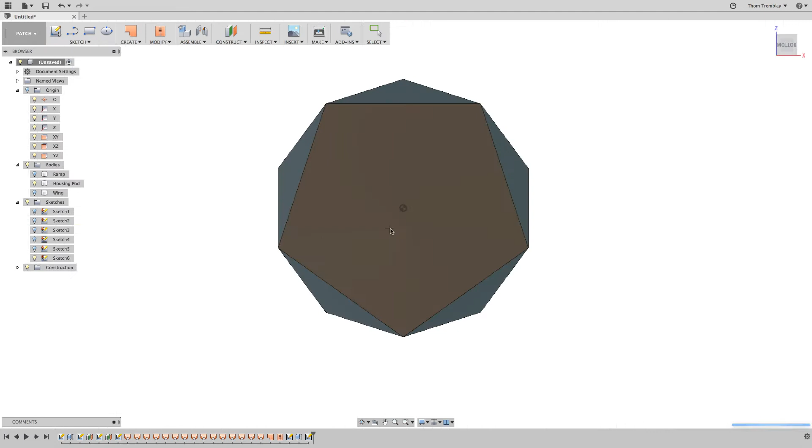Rather than creating freestanding bodies for the legs, we'll turn the housing pod back on and start a new sketch on the bottom, again using a polygon, this time a triangle to space the legs out.

I'll add circles to the endpoints of the triangle, setting a diameter of 2.5 millimeters to the first leg. Then, rather than applying dimensions to the other two circles, I'll use the equal constraint to make sure that all of the legs are the same size.

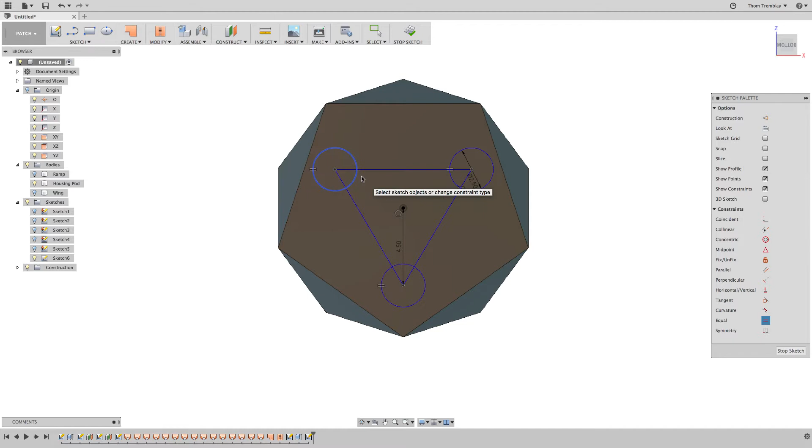An option that's been explored in other lessons is to use construction geometry, but in this case I'll leave the triangle as normal geometry and simply select the 6 different sections to define the cylinders.

I'll extrude them out 6 millimeters, joining them to the housing pod, and turn the ramp on.

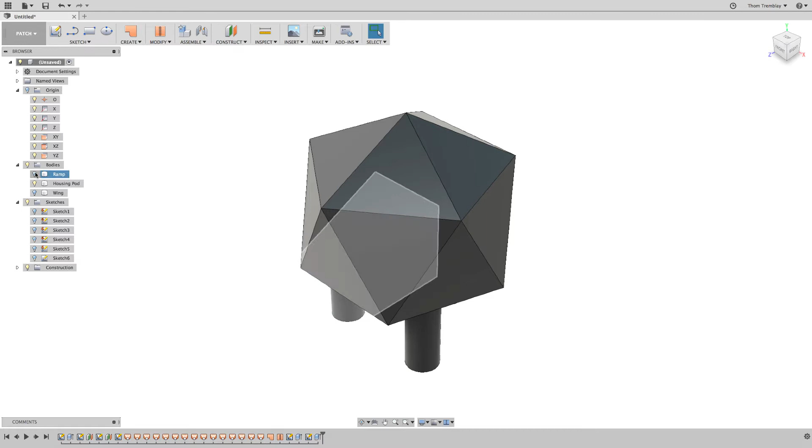In other exercises, we've used joints to relocate components and to connect them together. For the habitat, we're working with bodies. Bodies cannot be joined; however, the geometry of bodies can be used to reference the location of other bodies.

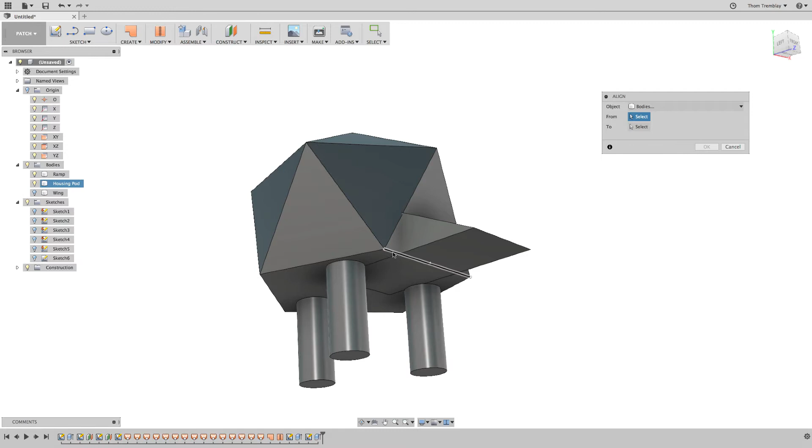From the Modify pull-down of either the Patch workspace or the Model workspace, I can start the Align tool. I'll make sure the Object option is set to Bodies, and then pick the bottom edge of the housing pod. For the second location, I'll pick the top edge of the ramp, and it will relocate the housing pod. When I click OK, the housing pod will be in its new location, aligned with the ramp.

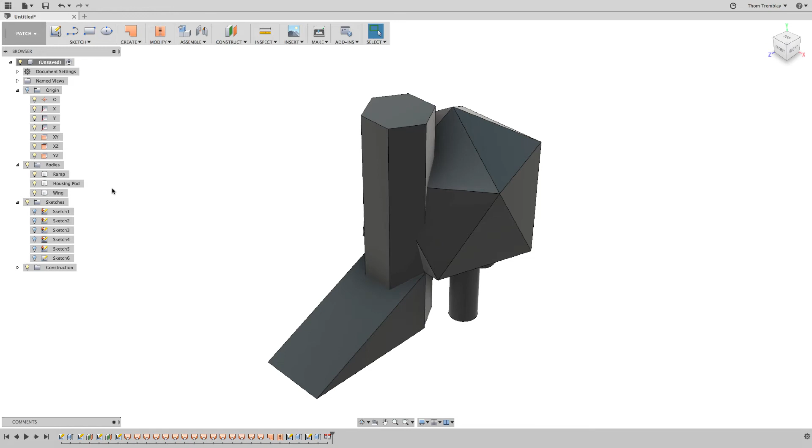I'll turn the wing back on, and for clarity, turn the ramp off. This time, I'll use the Move Copy tool to relocate the wing.

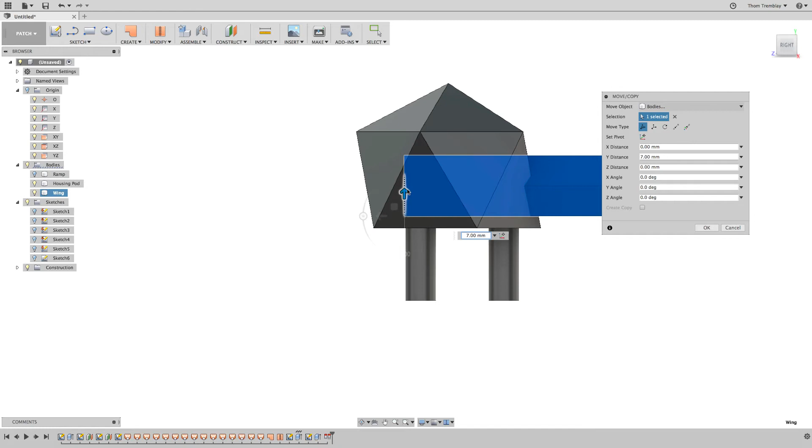I'll select the bottom edge of the wing, and it will give me a manipulator that will allow me to rotate the wing in place. I'll rotate it to be horizontal, so -90 degrees in my model, and then use the arrow or plane manipulators to move it up and back to its proper position with the housing pod.

When it's in the correct position, I'll simply click OK and take a look at the work.

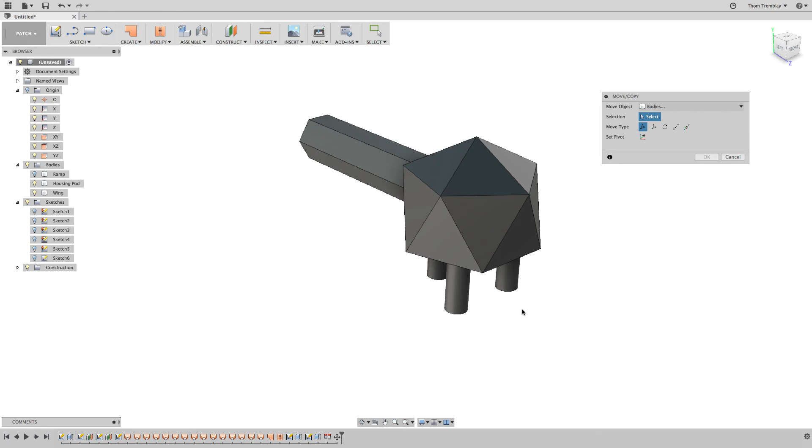Now what I need to do is replicate the housing pod and the wings to a second location. I'll start the Move Copy tool again, making sure that the Move object is still set to Bodies.

I'll select the housing pod and the wing, and using the Create Copy option, use the manipulator to create a second instance of the housing pod and wing, move it back, and rotate it 90 degrees into its correct position.

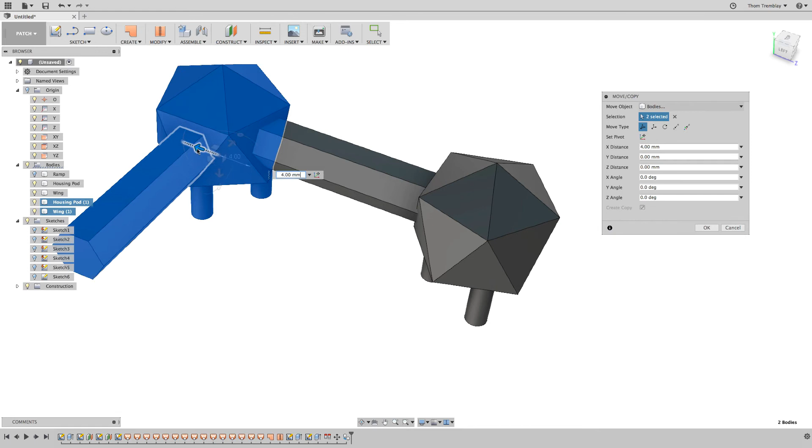Now I have one side of the habitat complete. At the center of the habitat is a control pod. To create it, I'll switch to the Model workspace, go to the Create pull-down, and use the Sphere primitive.

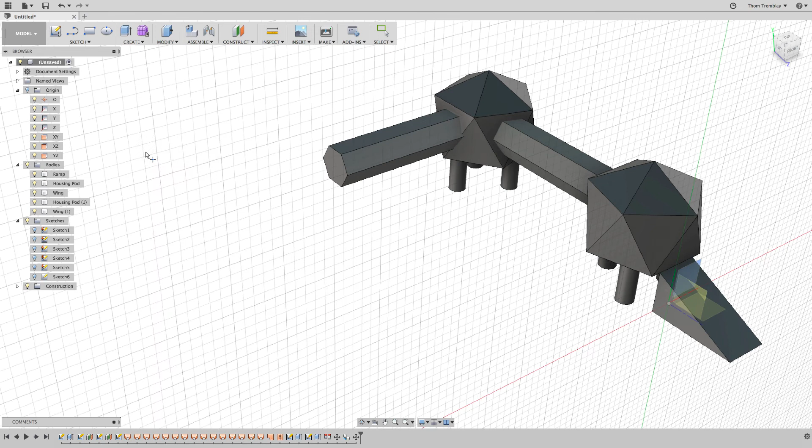I'll select the origin of the model as the center point. Setting the diameter to 36, you'll see that the operation is cutting material away from the other bodies.

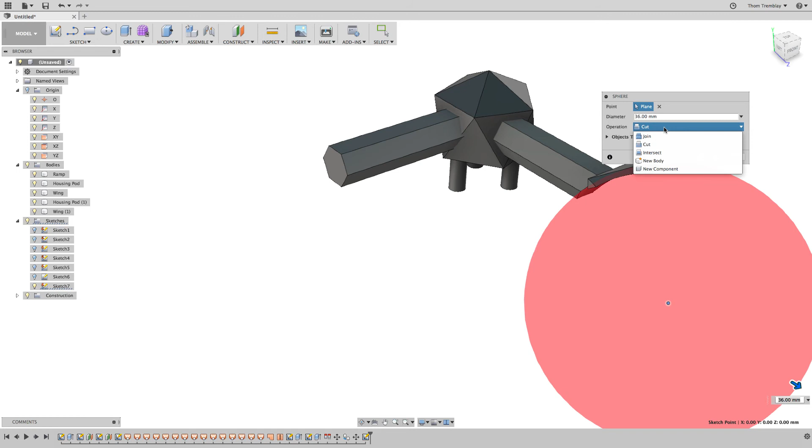Because this new primitive exists at the same level as the other bodies, the natural assumption is that we want to cut geometry from the existing bodies. I'll use the Operation pull-down to switch this to a new body, and when I click OK, it will create a sphere based on the origin of the design.

Now I'll use the Move Copy tool to relocate the sphere -38 millimeters to the left and 37 millimeters back so that it aligns properly with the recently created wing.

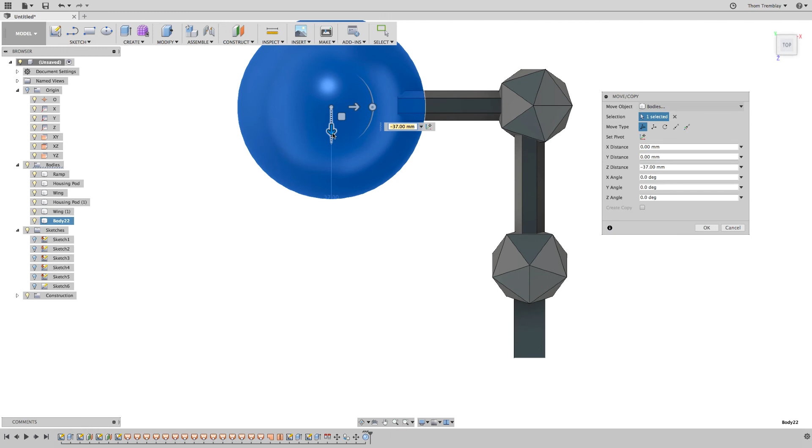Looking at the front view, I see that it has to be raised as well. I'll raise the sphere up its radius, which is 18, and then click OK to finish relocating it.

The last step in creating the major portion of the habitat is to replicate the wings and housing pods to the other side of the sphere. But I chose to start generating my design with the origin located to what is now the side.

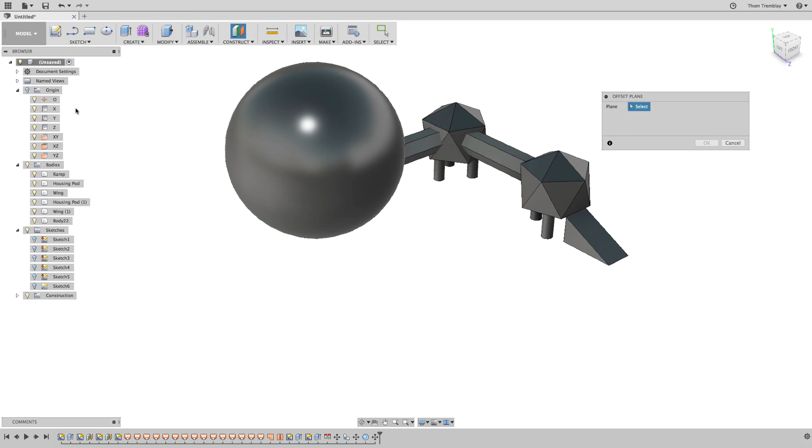To accommodate this, I could either move the entire assembly over to the right 38 millimeters, or I can create a construction plane that is offset 38 millimeters to create a new center plane.

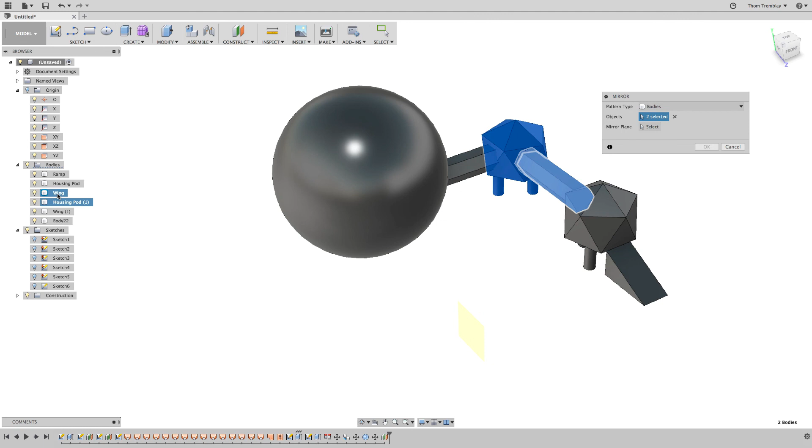With this complete, I'll use the Mirror tool from the Create pull-down, make sure the pattern type is set to Bodies, and select the instances of the ramp, housing pod, and wings that are in the design. Setting the mirror plane to the newly created construction plane, we have the mirror of our bodies.

In the next lesson, we'll finish the final detailing of the design.